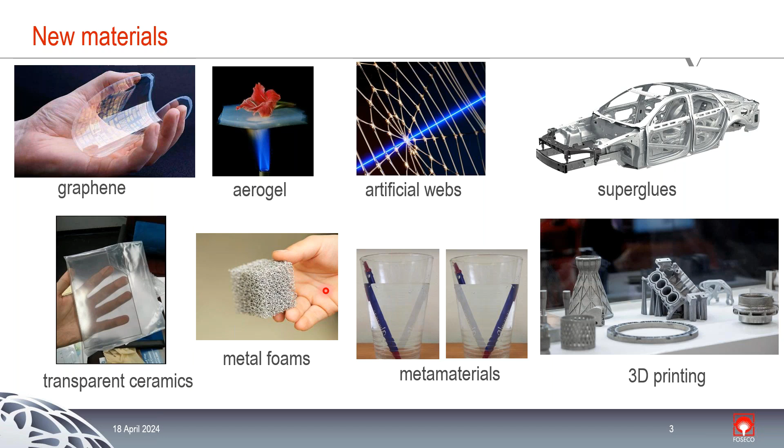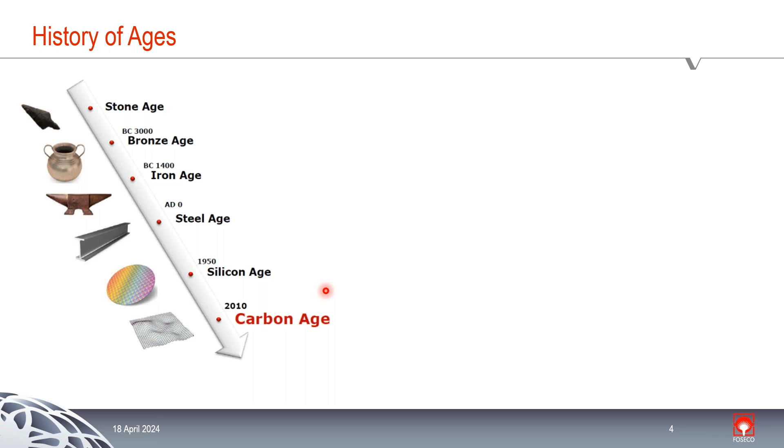And I really love this histogram, the history of ages, because they are all named after materials: Stone Age, Bronze Age, Iron Age, Steel Age, Silicon Age. For those of you who don't know me, I am an expert, and my expertise is in aluminum. So I would like to request a new era somewhere here, because aluminum has changed engineering forever. I hope I will change history and put the Aluminum Age somewhere here as well.

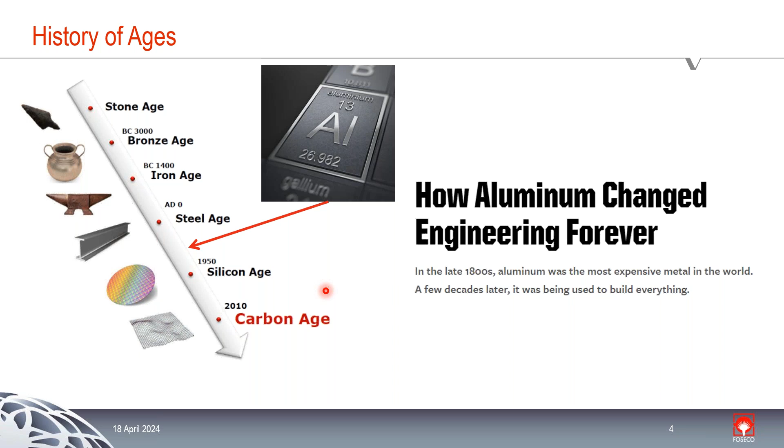That's my goal, with the historians and everybody. So as we can see, all the ages in history are based on materials. When it comes to design, it is defined as the process of translating a new idea or a new market need into detailed information from which a product can be manufactured. So we have to have an idea, or there should be a market need.

In that sense, we have this very famous tetrahedron: we should have a structure, that structure has to have certain properties, and those properties will result in a certain performance, but it has to be produced by a certain process. So when we are designing, the product should have a weight, it should maybe carry a load, conduct heat, conduct electricity, has certain wear properties, corrosion properties. So our design has a function, a geometry, a material, and it should be produced by a process. So you need a lot of alternative materials and a lot of materials information.

Exactly. We need a lot of information.

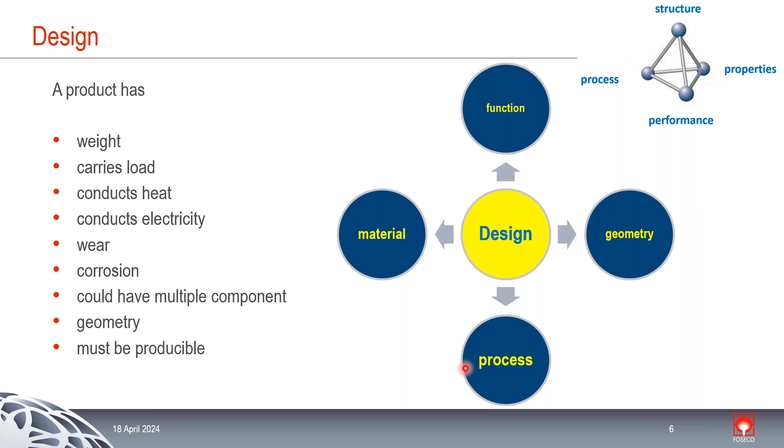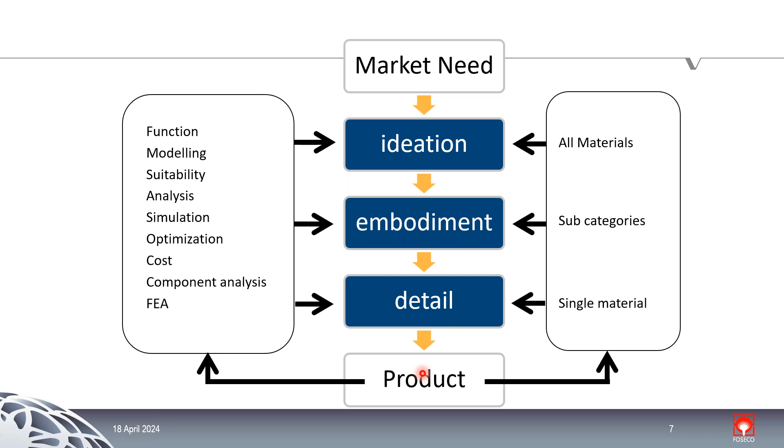And the diagram goes like this, as mentioned previously. There is a market need, therefore there is an idea, and at the idea stage there is a list of all materials, and then there is an embodiment. We get narrowed down to subcategories, and after that we need to find the function, suitability analysis, optimization, some cost analysis, and then we go into detail, where we have the single material, and from that single material we have our product. But there is also a cycle of this improvement, like we have seen in the previous slide.

Yes, there was a need, there was all data, we have the concept, and then less data, and then a single data when we found our product and we start producing it.

But this is not good enough, just producing and putting it in service, because after the production, it should be used, and after the usage of these materials in any application, there is a certain life. In this cycle, everything seems perfect up until we make the design and select our material and produce it. It's okay so far, but in usage, we need to make sure when it fails, how it fails, why it failed, and we answer all those questions.

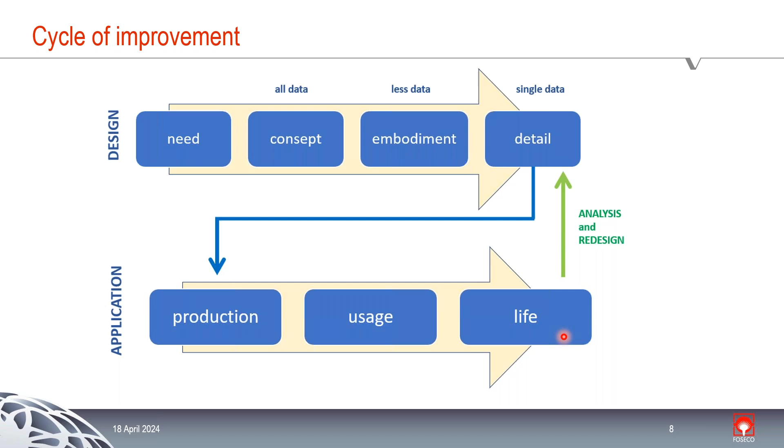So we have the life of this material in the application, and then we can do reanalysis or redesign, maybe change the design or maybe change the material, and try to extend this as best as we can. This is the critical point, the life, because from there, when the material is selected, produced and in use, we get more information, because we start to understand how it works, why it fails, how it fails. So from that, we can change our materials or our design, based on the evaluation of our materials.

For example, glass was initially used as liquid containers, but glass was a little bit heavy, healthy but brittle. So we changed into plastics now, and we can even recycle plastics now. Steel was used as food containers. It was slightly heavy, but not corrosion resistant. So we needed to apply several different coatings, or several precautions, in this design so that the food life would be extended as late as possible. But with the finding of aluminium, it became lighter and more food friendly, and corrosion resistant, and no toxicity as well.

So in this life cycle, the funniest example I found on the internet was this picture, I really liked it: if Titanic sinks today, everybody will be taking pictures. But this life cycle is like most things, we think it is the best suitable material, we can produce it, we can have it in use, but suddenly we came across a very dramatic failure. Then we started to understand the impact properties of materials at different temperatures, so we developed new materials so they can survive under these circumstances.

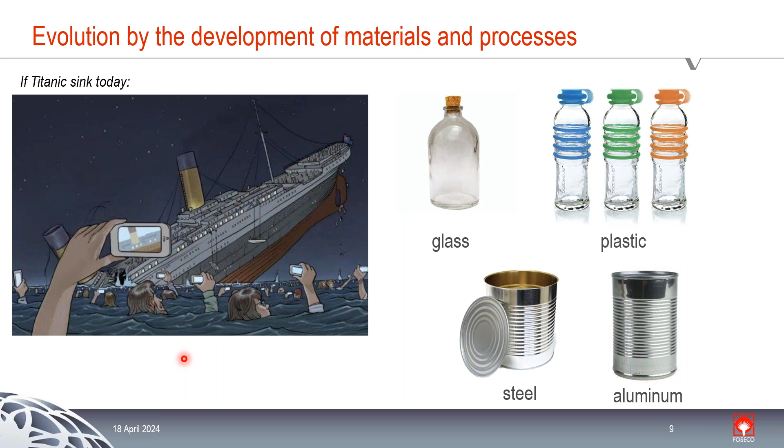So standard material properties are not enough under the specific conditions. Yeah, you need to test the materials and have to have this data.

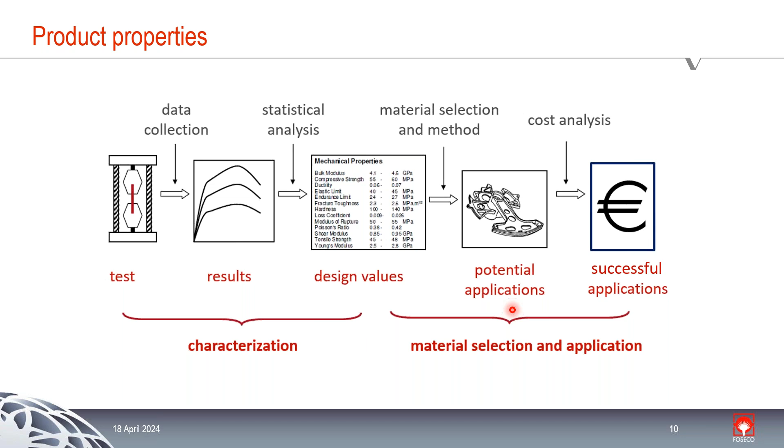Exactly, true. So for example, in passenger airplanes, because they only lift off and land, there is almost one directional movement for passenger airplanes. So the forces applied and subject to the materials are almost in simple directions. So we characterize these properties, and based on them, we know that up to 50,000 or 100,000 hours later, we do our checks and maybe change the part. But for fighter aircrafts, this is 6,000 hours. The main reason is that the forces applied on the aircrafts, because of their agility and maneuvers, come in many different dimensions and with many different strengths and values. So our material has to be different that we choose.

Yesterday we were talking about fatigue when people find out that, even if you have a lot of properties or you make a design that's okay, it will stand forever, like. But then engineers find out that there is a thing that exists, and it is fatigue. Microstructural cracks becoming all at once, and then all of a sudden failure comes out. Like in airplanes, it's unacceptable. Yeah, true.

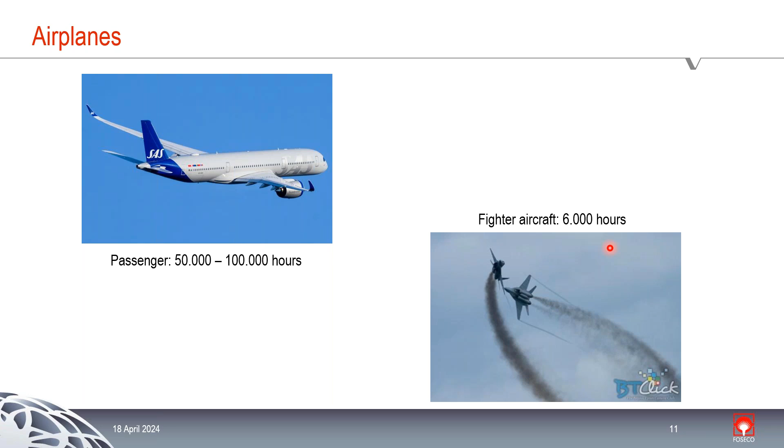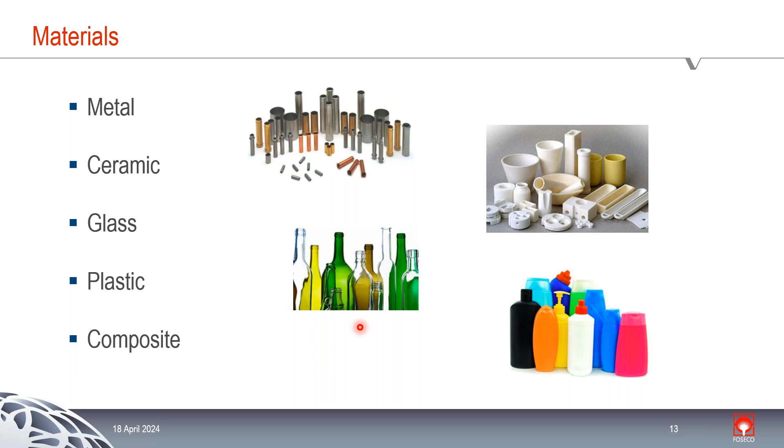Yeah, so materials, these are just basic information. As we all know, we classify materials as metal, ceramic, glass, plastic, and composites. And for each of them, there is always general knowledge. Like metals, as we know, aluminum, steel, iron, magnesium. And we know that they have high electrical conductivity, high thermal conductivity. They can be ductile, easy to shape, and cheap to produce.

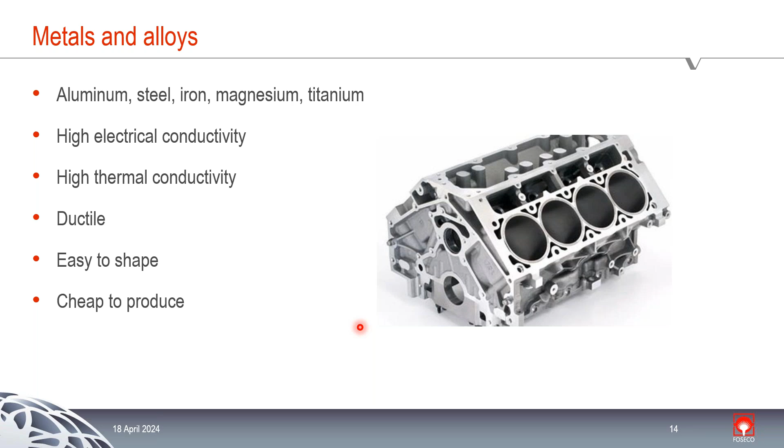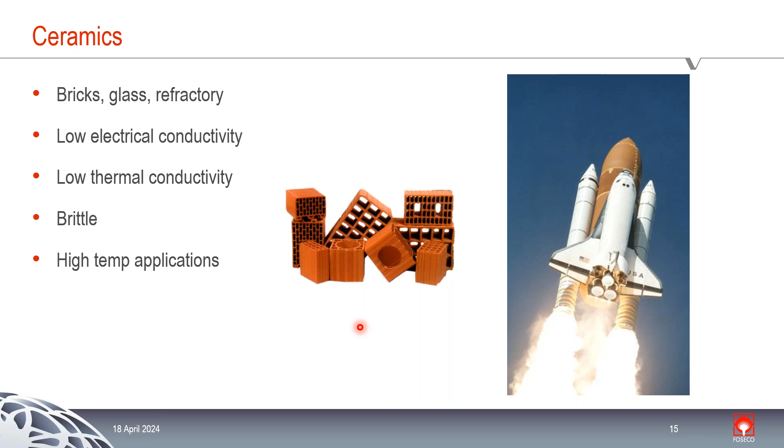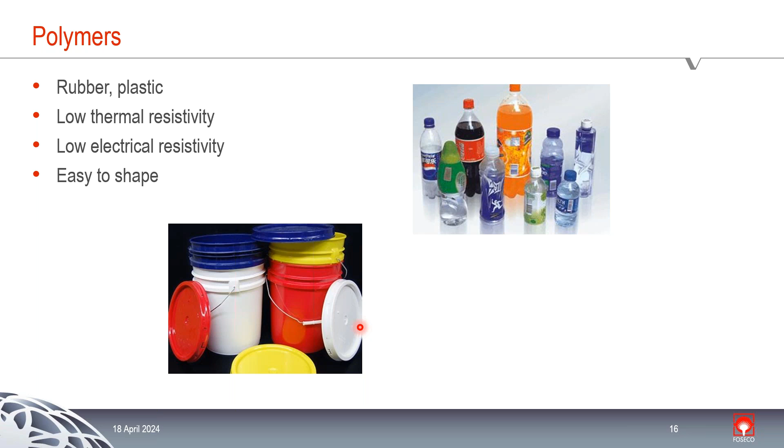Ceramics, low electrical conductivity, low thermal conductivity. We know they are mostly very brittle materials, and usually we select these kinds of materials in high temperature applications for their certain properties. Same with the polymers, low thermal resistivity, low electrical resistivity, easy to shape. Composites, a combination of at least two different materials, and they have low density, high strength, and typically they are known to be a little expensive.

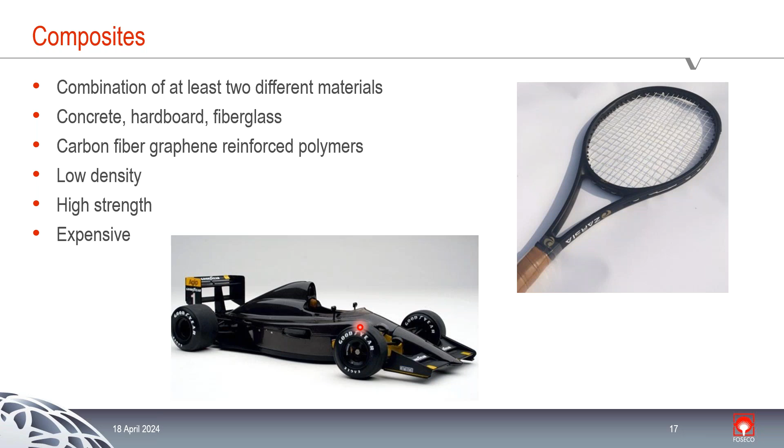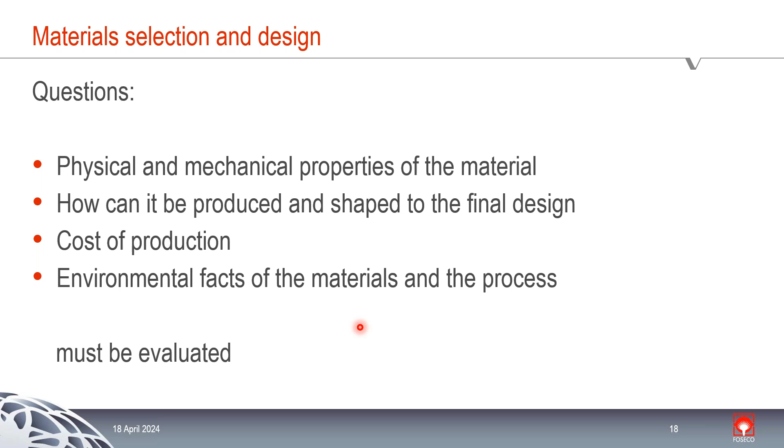So when we are making a material selection and design, there should be several questions, like what are the physical and mechanical properties of these materials, how can we produce it and give the final shape to this design, and what would be the cost of this. And lately it's been very popular, as we all know, the environmental facts, CO2 emissions, sustainability. So the environmental facts of the materials we select, and also the process we apply to produce the final design, become quite critical. So all these questions have to be evaluated when we are making a selection.

And the most famous material selection method was proposed by Ashby. It goes through 4 stages. The first stage is the translation. So we need to know the function. We need to have the objectives. Do we have any constraints? For example, we cannot go higher than 10 kg for this part, or this cannot be more than 1 meter long. So we should have the constraints, and we should also have free variables, so that we can think about the geometry, the design, the shape, and everything.

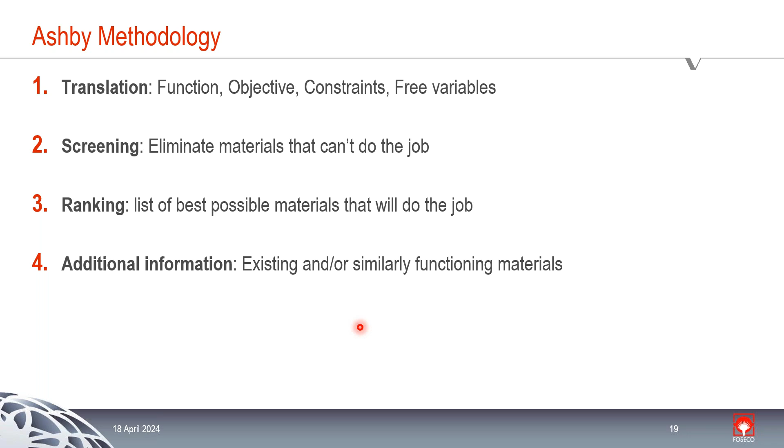And then the screening, which is eliminating the materials that will not be able to do this job, and then ranking the list of best possible materials that can do the job. And there is also always additional information, like existing or similarly functioning materials in use. Those kinds of information can lead us to finding the best material that we can choose.

And there is also the performance equation that can be used, but this equation can be converted to many different parameters. For example, the simplest example here is that strength is always the force over the cross-section area, and mass is density times the volume. And if it's a cylindrical part, then we have the length and the cross-section area. And from all these equations, we can combine them in a single way.

For example, in this example, we have mass should be greater than, so here instead of area, we can put force over the strength of the material, and then the formula becomes the force applied to the material, the length of this material, and what we call a performance index, which is the density of the material divided by its strength. So here the performance equation is the weight. Probably there was a weight reduction requirement, but it had a certain force applied on it and a certain length. So these are our functional and geometrical parameters that were fixed, as mentioned in the Ashby methodology.

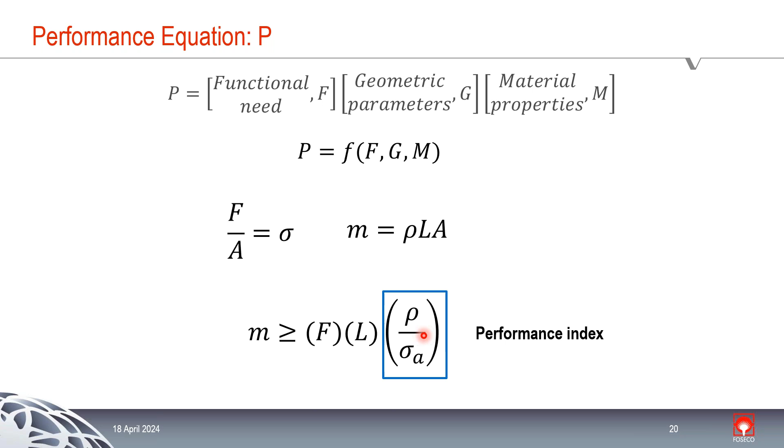So what we can do is play around with this. If we want it to be lighter, we need to find the material that has low density with the highest strength. So those kinds of mathematical approaches can be done to find the best material depending on the need.

So it's all about the selection of the right material, you know, where it's going to work. So you have all this data, but then you need to find the most accurate material for that design.

Exactly. So like in the Ashby methodology, there are certain functions. If it must conduct electricity, then I need to look at the conductivity of these materials. If it has to carry a load, then I need to look at the strength. If it must be cheap, I think this is always the case, so I need to look at the cost of production. So how do we do that?

Actually, we look at books, publications, tables, databases, manufacturer catalogs, and all these data can be found easily, and these can aid us in our selection. I wanted to put a question mark next to internet, because yes, all of these things we can find through the internet, but we need to be really careful when doing research on materials, because the information has to be reliable.

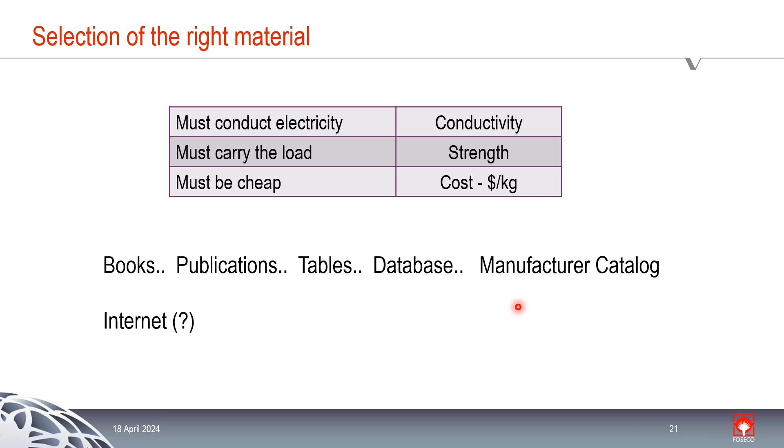So we need to make sure that this is a standard test, or this has been carried out under certain conditions, not just Googling through the internet and finding the best material. No, we need to make sure that every data that we find is reliable.

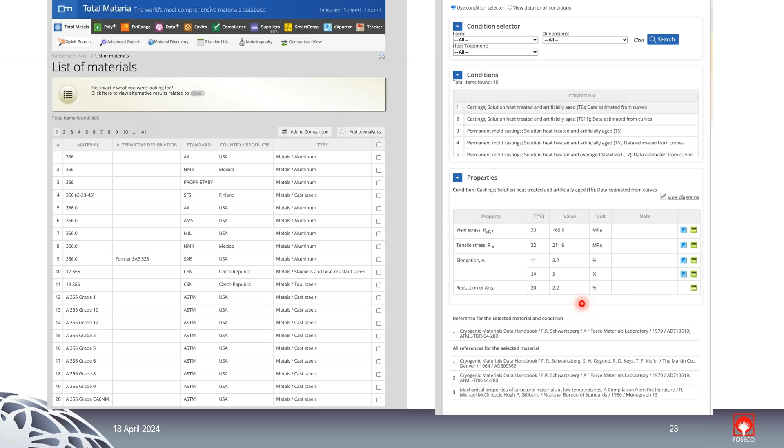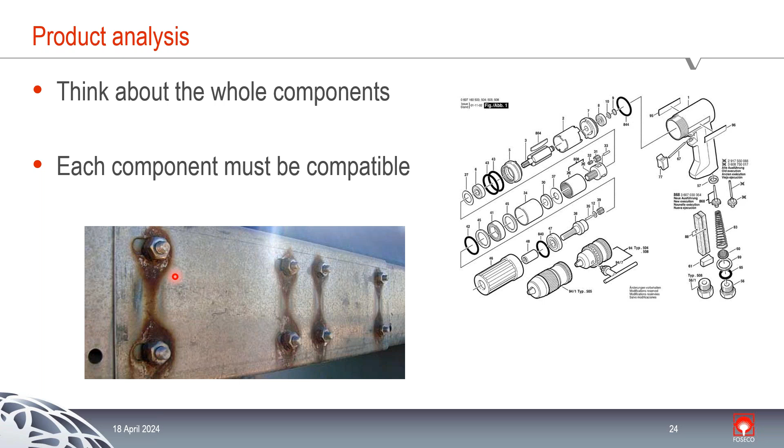So this is like a very failed material selection, a good example of how we should select for compatibility of different components together. So again, here is an example from you guys. Maybe you can explain this.

Yeah, we have joints. Or shall I just? All the welding, brazing, according to material, I mean, what material you are using. So you need to choose the precise joint for that, because, as a material engineer, there are new mechanical properties you are creating when you are welding a material, right? So it's very important what chemical composition is mixing with what material chemical composition to have a solid connection joint there.

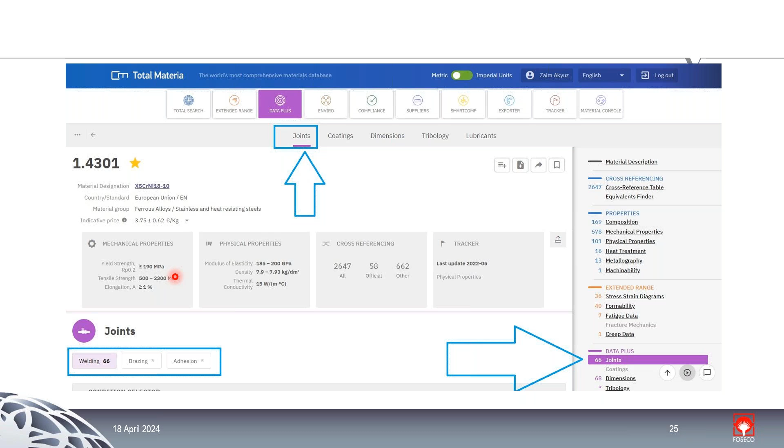We do have a lot of information: joints, corrosion, mechanical and physical properties, cross references, a lot of information. So like you said, we have joints data, understanding the chemical composition of the weld and also the mechanical and physical properties of the weld if given by the reference. Exactly. But also we have corrosion data, and that's really, really important. Understanding what corrosion rate you have according to a certain medium, concentration, and corrosion type.

Because we have a lot of different kinds of corrosion types which you can choose from, including cracking and pitting corrosion types. But with the mediums, we literally go from oil to water to acid to ketchup and mayonnaise and beer and whiskey. We have hundreds and hundreds of different mediums which you can choose from to understand if you can use the material you have chosen inside that medium and how resistant that material will be for a certain time period. Yes, so this is very important to understand as well.

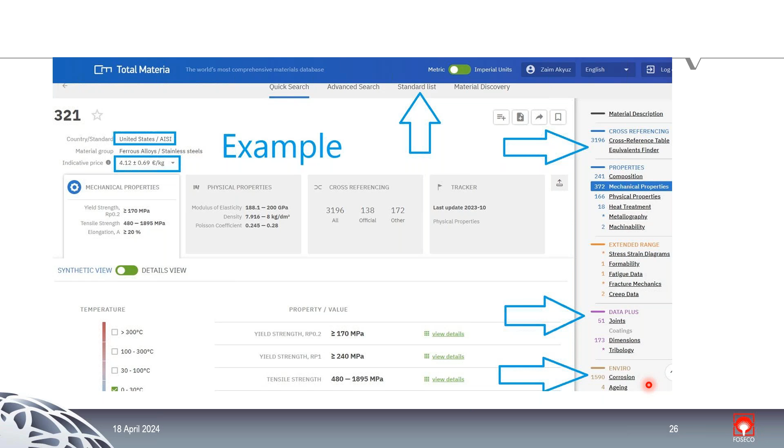Yeah, true. Yes, exactly. And we were talking about some market needs. For example, this innovative approach was, for me, one of the fantastic innovations in the automotive industry, because it's always weight reduction, and particularly from Formula One teams, there was a need to change the material of these forged steel crankshafts. But it was at the time a very difficult challenge. But with the development of new alloys, you can now have a hollow crankshaft.

You don't need to have a forging, because forging has the highest mechanical properties. But with a casting, with a cast iron, you can achieve the same property that is needed for this specific function. So you have now a lighter one. Yes, I guess we have some data from Total Materia. Yeah, so you are now lighter and almost achieve the same strength for this particular example. Yeah. And the great part is we have a lot of Formula One customers. Oh yeah. Yes.

So we are talking about all this information, how to select the material, which one to select, which one is proper. So there is a lot of information flying through and too many iterations going through. But maybe most of the time, there are customers that go to these providers and say, okay, I need this product to be produced by you. So they determine all the specifications. They give you the dimensions, the manufacturing method, the materials, all the measurements, tolerances, precisions, and now produce it for me.

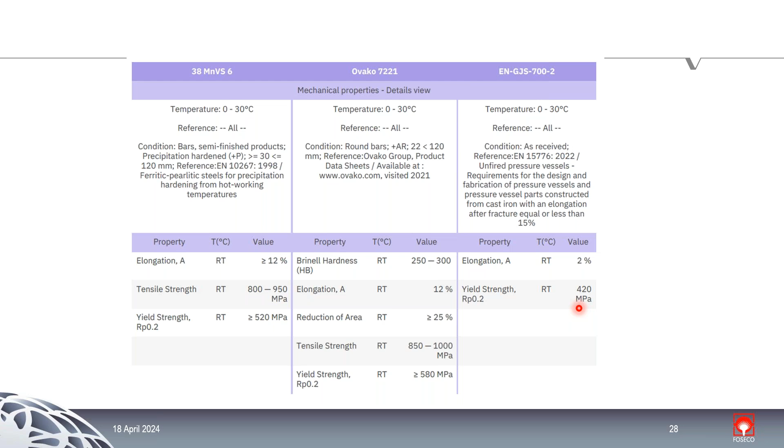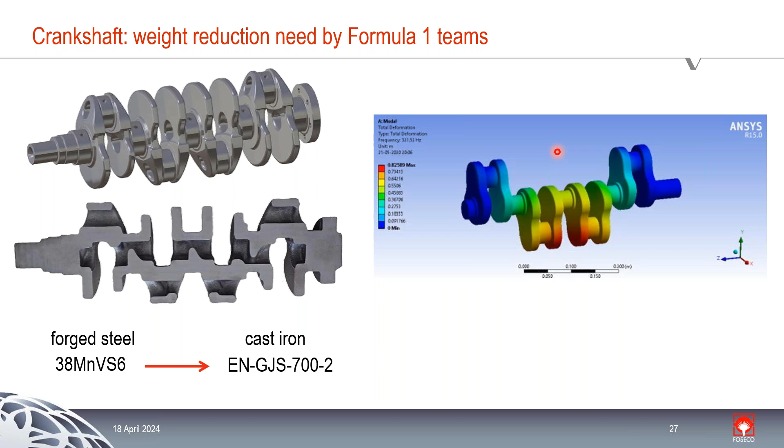Yeah, you see the forged strength of the crankshaft is around 800 megapascals. Cast iron has 400. So it looks like it's half of the strength. But you need to do a proper analysis to make sure that what you need is correct in a certain design that you are requesting.

So that's why I call it: the engineers and the customer are not always right, but you need to have this knowledge and experience to stand up against them and maybe even change the design and maybe even change the alloy.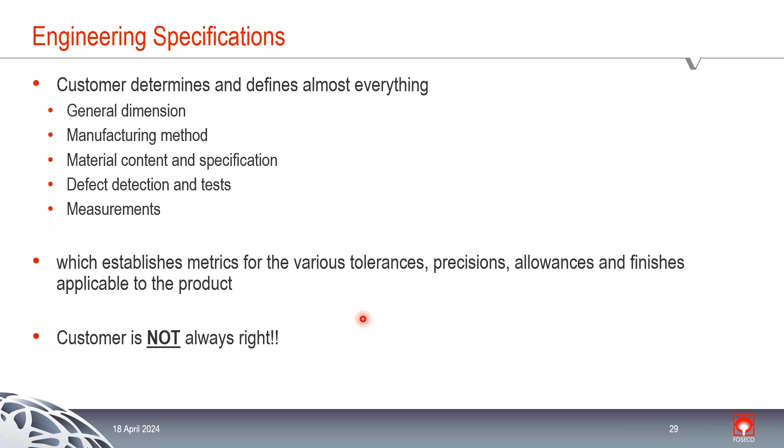So that's all I wanted to say for today. Thank you very much.

Seriously, because estimations are not enough for you to make the design work perfectly. Obviously, you need a lot of data, a lot of information, a lot of experience also. You're facing challenges that give you a lot of question marks. So you are the one who needs to solve all these problems.

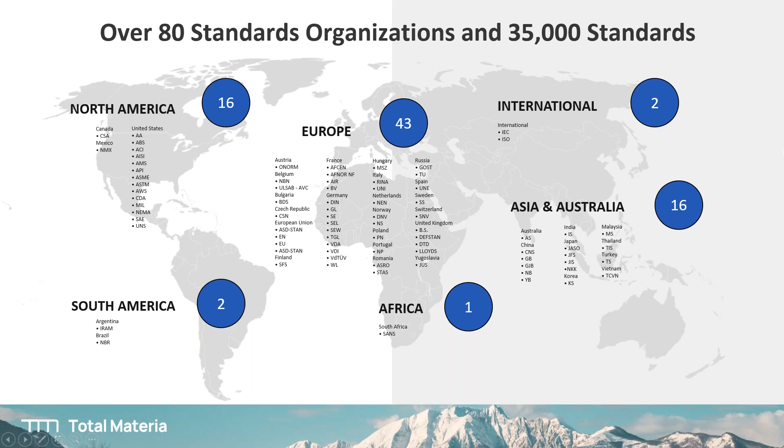So all of these different kinds of standards are connected, but also these producer data sheets provide us with missing gaps of information regarding metals, and most of these producer data sheets also give us information for polymer, ceramic or composite materials. Those producer data sheets also provide data regarding equivalency, but more importantly, compliance as well.

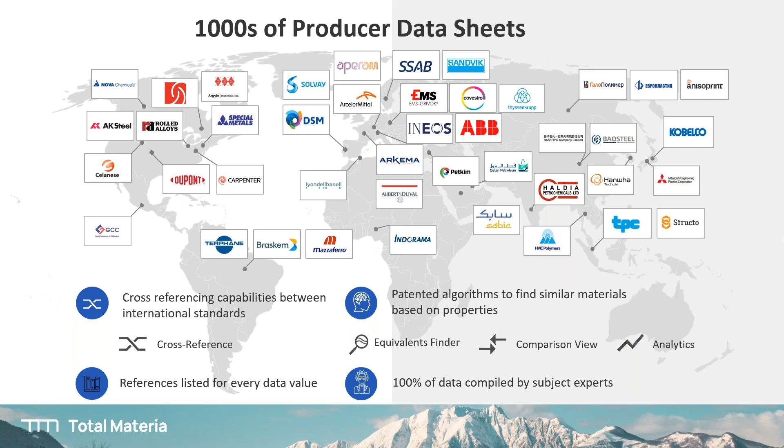Yes, sorry, Zaim. Yeah, sure. That was the point actually. The designations that standards provide are not clear across different standards. So this is the tool where you can find the equivalent material, exactly the designation in different standards.

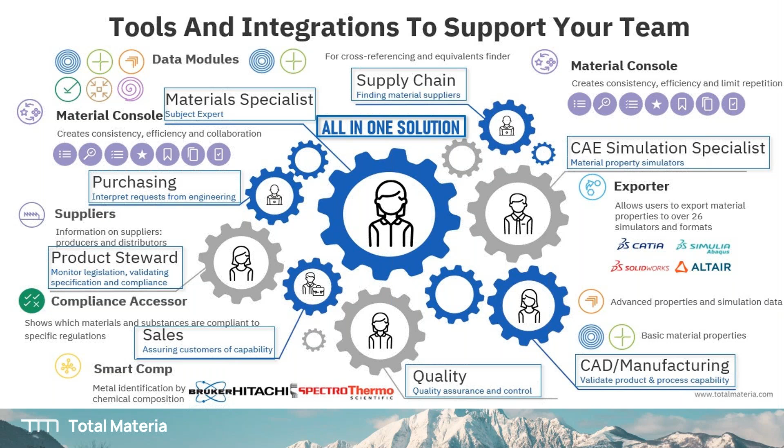So I hope everybody can see my screen.

I'm a Formula One fan myself. Yeah, it happens. All right. Verstappen. Of course. Because he's from the Netherlands, right? Yeah, I'm from the Netherlands, so I'm a Max Verstappen fan. It makes kind of sense.

You can see my screen, yes? Yeah, fantastic. So this is the platform. I'll be showing you a little bit of live demo today. You can actually see in every data set a little bit all the topics that Derya and Zaim were talking about today. Green Line, all about compliancy and sustainability. Predictor is through machine learning, filling up missing gaps of information. And we also have all these other data sets as well, very quickly. Total Search, looking for a designation, or advanced search and material discovery, doing a material selection. And that's what I'll be showing you today.

However, we also have a lot of advanced properties and nonlinear data in our Extended Range, plus all the joints data that Derya was talking about, and in our Enviro, all the corrosion data that he was talking about. Finding a supplier, a locally available supplier, which has those alternative materials or materials that you need, which are maybe cheaper, because inside our platform we also provide indicative prices as well. We also have SmartComp. Through SmartComp, we can identify materials through their chemical composition, or very simply, you can use this for reverse engineering or even quality control.

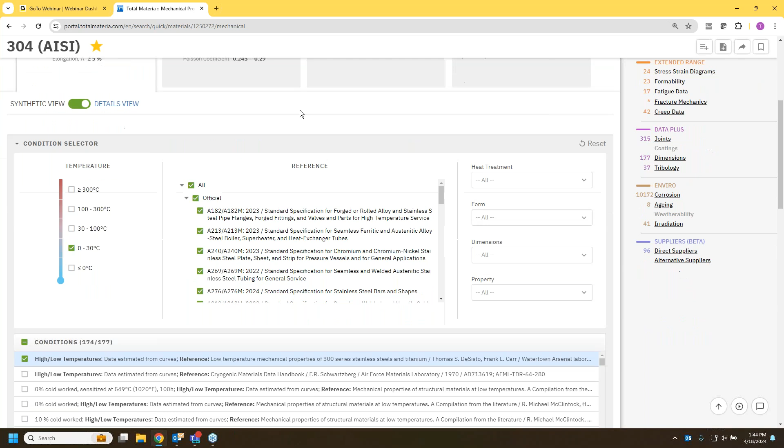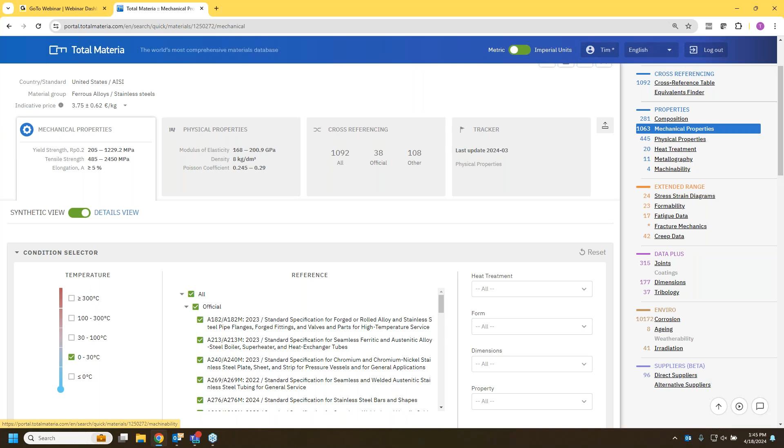So in the middle here, references. At the bottom you can see that we have 177 conditions, again with the references and the conditions, and then below you'll be able to see those properties and those values and the temperatures that we have chosen. Again, the references with the conditions, and again below, just in case you have not seen it yet, you'll be able to see the references again where we got this information from. Also, physical properties, a cross-referencing table where you can find equivalent materials. And on the right-hand side, of course, the chemical composition, metallography data, heat treatment data, including TTT diagrams, CCT diagrams, even some advanced property data, stress-strain diagrams.

I think this is because of what Derya said. We are designing, and then when customers start using it under specific conditions, then we know more about that design. This is what Extended Range gives you, right? Absolutely. So advanced properties for the designers and advanced properties in nonlinear data are extremely important. And then, of course, those joints and corrosion data as well.

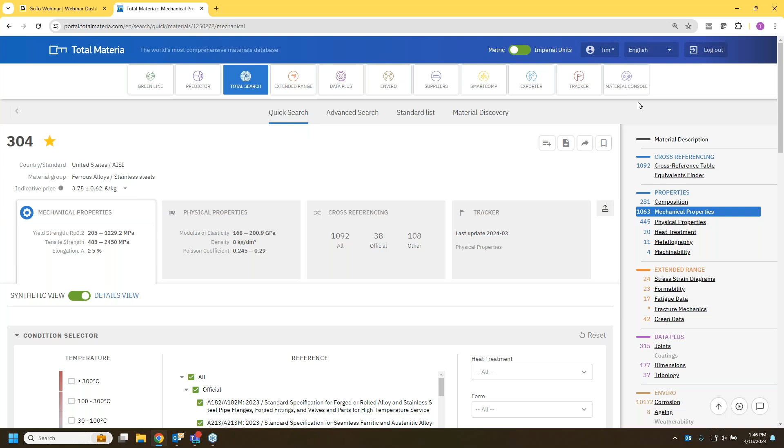And all of this information you can upload to your ANSYS, your Abaqus, your CATIA, Creo, SolidWorks, Solid Edge, HyperWorks, Excel sheet, XML format. You click on the solver that you need, take the data that you need, and upload it directly onto your design tools, CAD tools, or any other tools that you're using.

So if you know the material designation and you want to find the reference data from that material, you can fill in the designation inside the quick search and find the information that you need.

However, we were mostly talking today about material selection. It is extremely important that you find the right material for the right condition, the right design. So we have two ways to do a material selection. We can start from a clean canvas.

If you do not know yet which material you want to use for a certain design, material discovery is a perfect way to start. For example, if you're inside automotive, let's stick to the automotive part, you're looking for a light material, and you're looking for a very strong material.

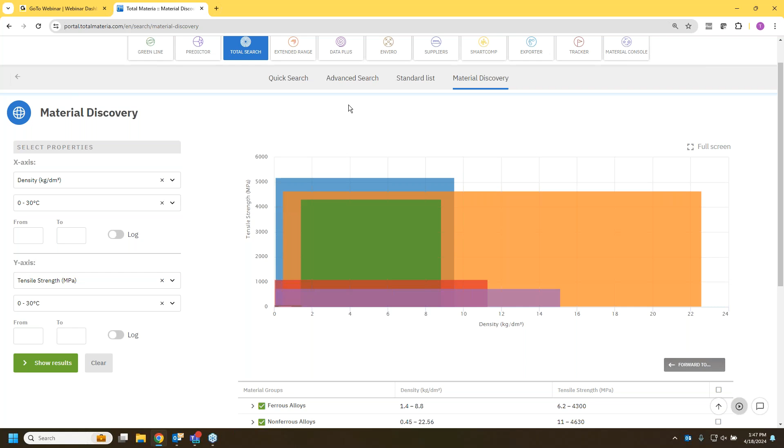For example, density versus the tensile strength. You can then show the results, and then you can see the groups of materials with their values. So you can see here the composites, the nonferrous alloys, the ferrous alloys, and also the polymers and ceramics. Then you can play around with this diagram and choose which group of material you need.

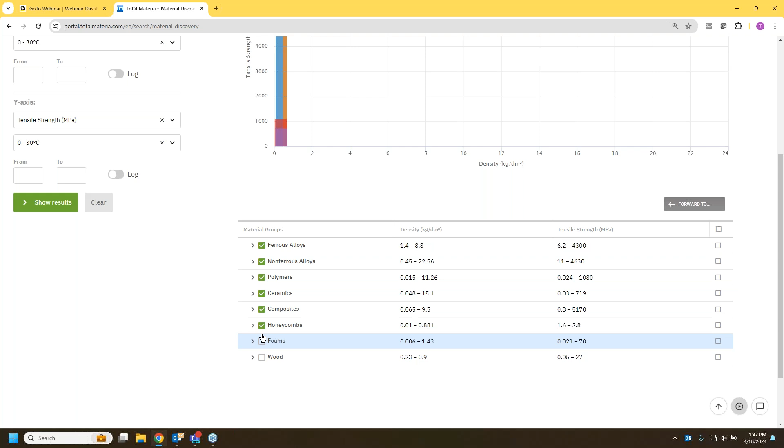So you're not interested in wood or foams or honeycombs, nor in ceramics, nor in ferrous alloys. However, I am interested in nonferrous alloys, but then I'm only interested in, for example, aluminium, and just to say something, for example, titanium.

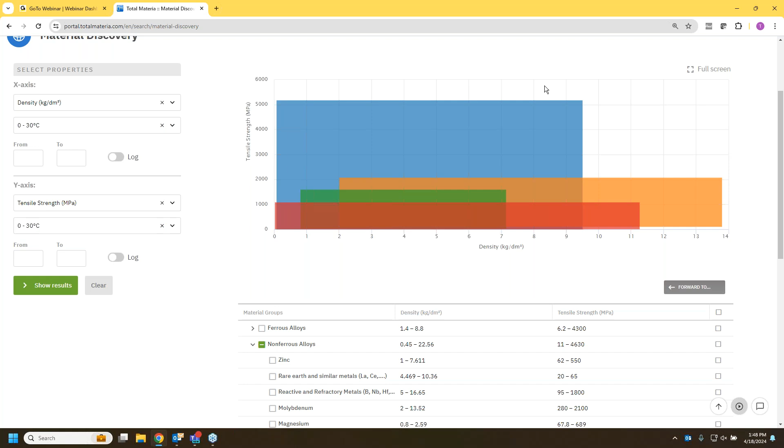And then you scroll up, and the diagram has changed. So we can see here now titanium and aluminium instead of nonferrous alloys. You can scroll down even further.

You can open up the polymer parts and open up the composites parts. And then when you scroll back up to the diagram, you can then see the different kinds of polymers and composites as well. You can even open this up further, and the diagram will change accordingly.

Now, the great thing about this is once you think, okay, I want to choose this group of material, you can then click on that material that you want to use, and then forward this onto our advanced search. So you're going from a group of material with averages from all the conditions and temperatures and values, and forwarding that decision regarding group of materials to our advanced search.

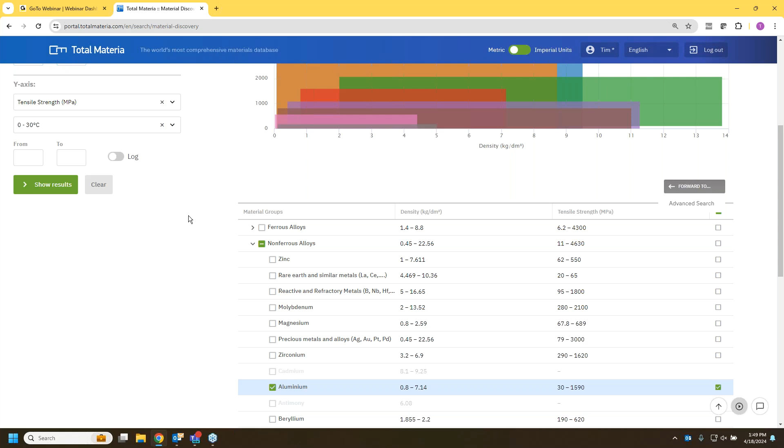And through our advanced search, you can add mechanical and physical properties or standards or other references to narrow down that search. So you're going from a group of material to real materials with real designations, with real conditions coming from real references, and of course getting that confidence in looking at that real data within our platform. So this is the material discovery.

I'm quickly going to clear this part and go to the advanced search. If you already know which group of material you're going to use, you can skip the material discovery part and go directly into our advanced search.

You can then choose that group of material, for example, structural and constructional steels, coming from a standard, I don't know, DIN standard, let's just use this one to make my life easier. And then you can add some text, for example automotive, aviation, aerospace, oil, forging, stamping, pressure valve, a boiler, whatever you might want to use to narrow down that search.

You can also add some mechanical properties. Do you need impact or elongation or yield strength or tensile strength? You can add these properties onto the search to narrow down that list of materials.

So for example, we can add one more, impact, and then you can choose the units. Of course, choosing units is really important. Choose the type, and then you can choose the values. For example, I want yield strength to be 300 minimum megapascal, for tensile I want 800, and for impact I want, let's say, 40 joule.

You can also add the temperatures in different values and units, and we can even add some physical properties as well. For example, modulus, that's a very famous one, and we can say 190 gigapascal. We can add this to the search. The more criteria you add to our material selection, the narrower the result will be.

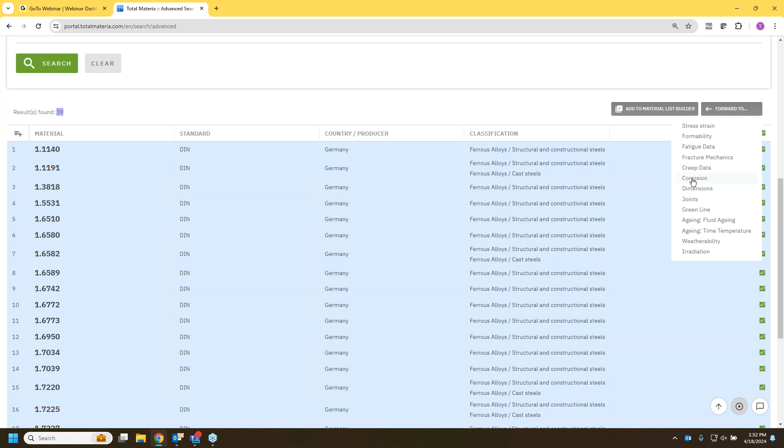However, what I'm going to do is add to my list. I'm going to add my list to my list builder, and I'm going to save this. So I'm going to say, sorry Derya, I hope that I write Derya correctly. Materials list. Yeah, that's fine. And this is a demo of Total Materia.

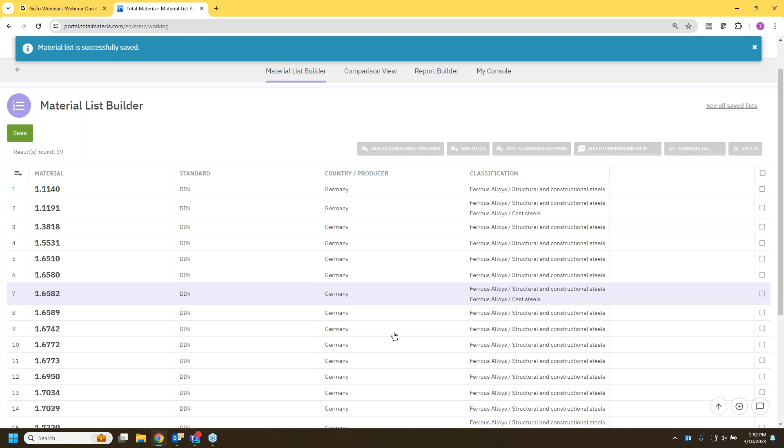So when I save this, my list will be saved inside my console, inside my materials list, and then if Derya wants, he can share this with his colleagues or upload for another time as well.

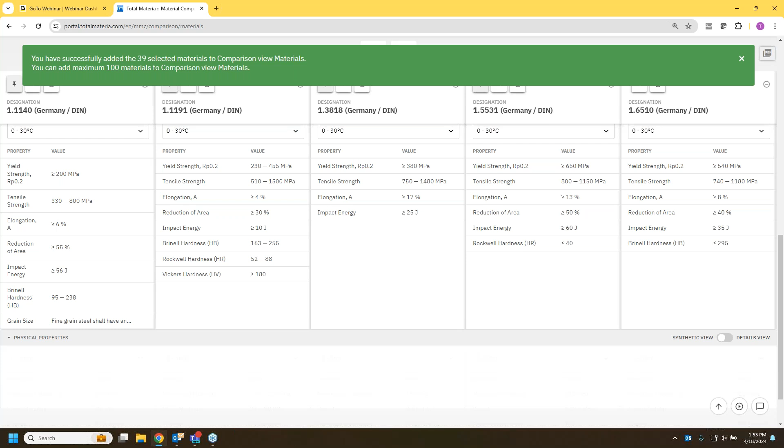These materials you can compare, and I'm going to go a little bit faster because the clock is ticking. You can add them to your comparison view to compare materials all next to each other, their mechanical and physical properties. Go to the left, go to the right, pin down the materials that you need, and make a PDF or upload this onto your report.

You can also compare these materials through their properties. You can create a nice radar chart or a diagram with the properties that you need. Or what you can do is forward these materials to analytics.

The great thing about this is not only can you compare the properties, but you can also compare the prices as well. We're giving indicative prices of each of these materials to give an idea of what the cost might be. But you can also just add the properties, impact versus, for example, tensile strength, press on results, and then you'll be able to see all those materials inside this diagram.

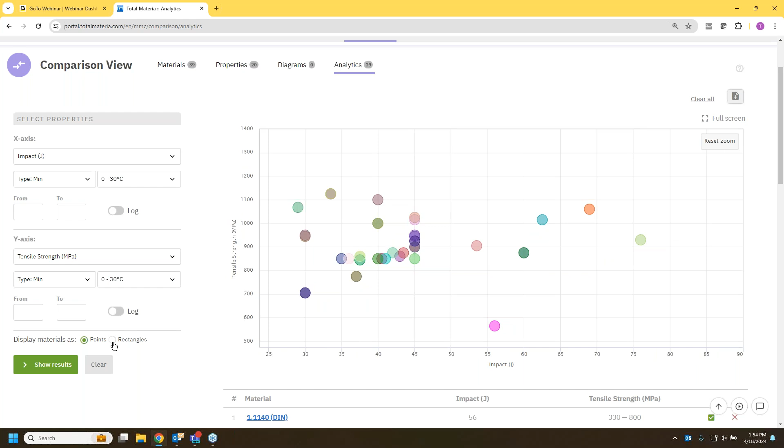You can even put this into a rectangle to show the full minimum values of each of the materials inside the diagram. You can scroll down, of course, and see this as a table as well.

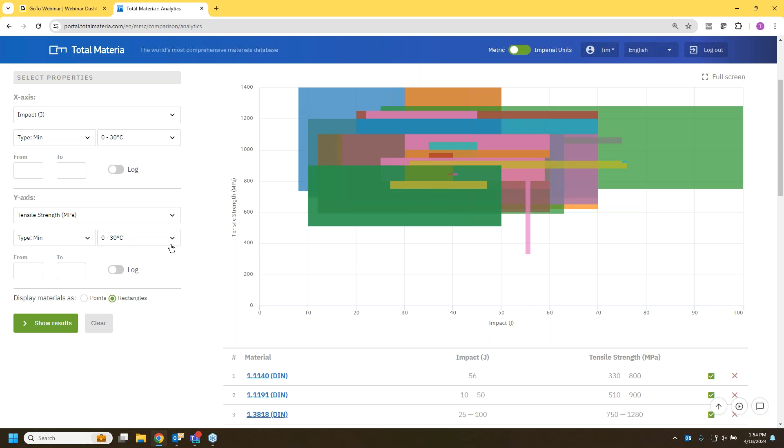So you might now understand which material you'd like to use for your design, for example. However, you still don't know the compliancy and what the CO2 emissions would be of these materials. So what you can do is go back.

There's lots of issues to be talking about. So what you can do is forward these materials, or just the ones that you have chosen. I'm not going to do all of them because that's a little bit ridiculous.

But I can forward this first to our compliance assessor and then assess if these materials are, for example, compliant to Article 59, so substances of very high concern, and if they're compliant to RoHS, for example RoHS Europe 2015, and then you can assess these materials to see if they're compliant according to regulations.

This list you can then upload onto your Excel sheet to help you justify your material decision, not just regarding your material selection, but also regarding compliancy.

At the same time, you'll also be able to understand what the exact carbon emissions are of these materials. So here we have those few materials, and then we can add the parameters. What is the manufacturing region of manufacturing? For example, Germany. We can say the manufacturing route, let's say EAF.

We can maybe lower down a little bit the recycled content. We can add the process, for example hot rolling. We can add, again, the region Germany, and we can add this to the process.

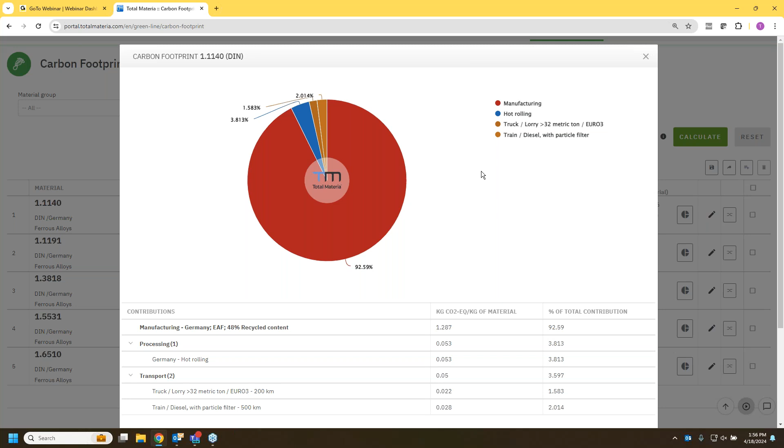You can even see the carbon footprint in a nice pie chart, to know exactly where the most emissions are coming from. You can play around with this as well. Then you can also click on the cross-referencing part to understand for an equivalent material that maybe has less carbon emissions.

Some of those materials are causing some carbon footprint, obviously. So exactly like it says, you can then click on the equivalent material, find an equivalent material that has less carbon emissions.

So there's a lot of ways to understand not only the material selection, finding the material with the best properties for the best price in a local area, but also understanding if the materials you've chosen are compliant with the regulations you need to follow. At the same time, understanding which of the materials you're interested in have the lowest carbon emissions, and if they don't, is there an equivalent material that does?

Yes, and that's where I'm going to stop because the time is going really fast, and Zaim is going to kill me because I can talk a lot about this topic. It's all about information. Maybe briefly, I'll show predictor as well. Do we have time, Zaim? Yes, we still have 2 minutes.

Fantastic. So, as everybody knows, there are materials that have missing gaps of information. What we do within Total Materia is provide material information coming from references. Most of our competitors have all theoretical or typical data. We don't do that.

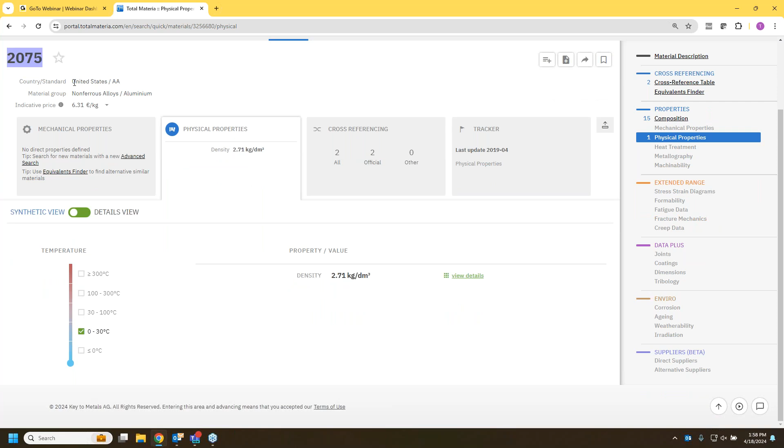We have real data coming from real references. If the reference doesn't provide us with mechanical properties or physical properties, through an equivalent material we can still try to help you. However, even through an equivalent material, sometimes you will not be able to find those properties. You can see, for example, this material 2075 - the AA standard organization, this official source, is only providing us with the property density and some chemical composition. That is all that this standard is telling us.

So if you need information, sometimes we go to the cross-referencing table - that's the first thing you can do. But even if those equivalent materials are not providing us with the data, you can then use our machine learning.

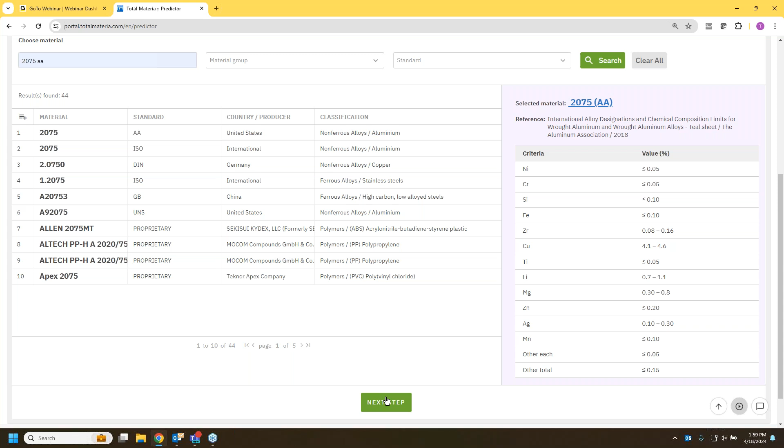So for example, we can add that material 2075 to our predictor. We press on search. We found that material with the chemical composition. We press the next step, and then you can choose the model description - what kind of information are you in need of? For example, I am looking for the minimum value of yield strength at room temperature.

I can click on next step, press on predict, and then you can choose the product. For example, I want bars, diameter, thickness 20 millimeters, direction L long, and the T6 heat treatment condition. Then we can predict, and you'll be able to see the information provided - the yield strength regarding room temperature - and it's fully applicable.

Of course, we also have diagrams, but I need to show you another step - we can do that another time. We literally tested a material in seconds. So yeah, that's a lot of things to talk about with Total Materia, and we don't have much time.